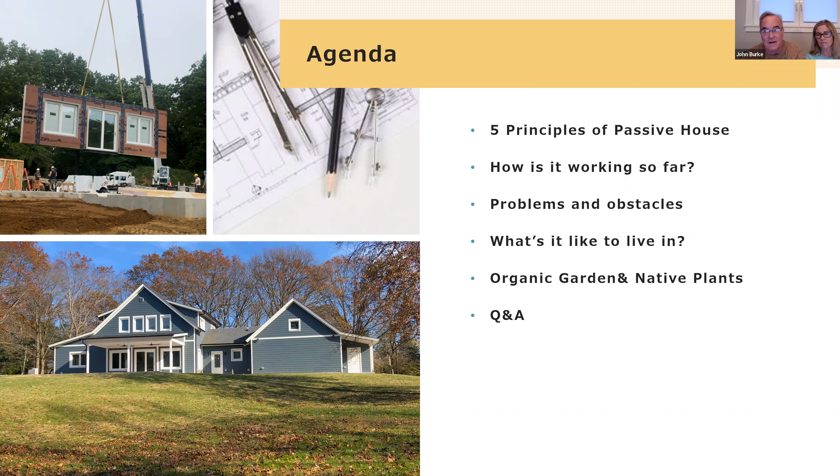So we'll walk you through it. Here's what we're going to cover. Steve asked us to cover the 5 principles of passive house, so we'll do that. We'll talk about how is it working so far. We've really been in here about 2 months, so we can talk a little bit about that. Problems and obstacles we encountered and had to overcome to get it done. What's it like to live in, which will give you a little preview. It's really good. And the organic garden, native plants, Diane's passion. And then we'll have Q&A. So yeah, as Pat mentioned, please hold the questions to the end, and then you can put them in the chat and we'll try to cover everything.

So the 5 principles of passive house, here they are. No thermal bridging. So the walls, floors, and roof are extremely well insulated, trying to minimize or eliminate thermal bridging, which is how heat transfers, pretty much going from hot to cold. Hot's always going to find a way to go to the cold, and you don't want that happening in your house either direction. Superior windows are really important, and we've done that. We'll cover each of these areas specifically.

Energy recovery ventilation, which is one of the really cool things about these houses. When we first started, I didn't know about this, and when I found out about it, I thought it was really interesting. And now seeing it work in real life, it's fascinating. It really works well. Quality of construction is very important. You don't want any leaks. Everything's got to fit together properly and be well made. And that leads to the last thing, airtight construction. We don't want any air getting into or out of the house other than what we want to do in a controlled fashion.

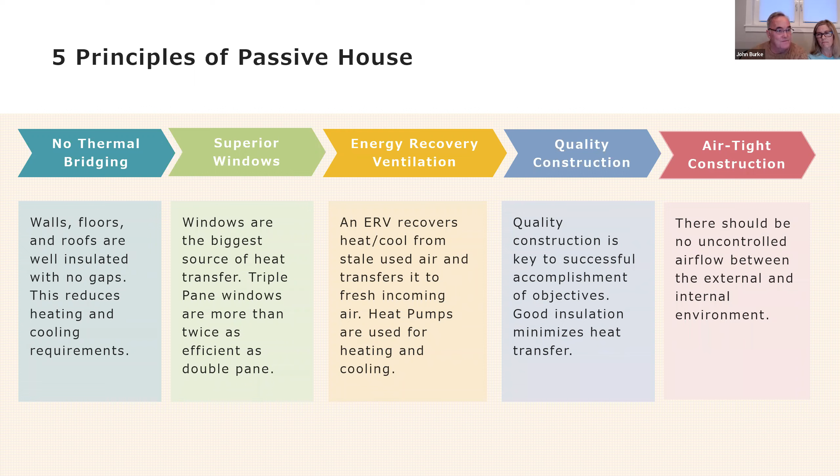So the no thermal bridging. Here's a picture of our house being built, and we'll go through how it was built in a second. But you can see these panels. There's a crane putting the panels down on our foundation. Those are 18 inches thick as opposed to a regular 2x4 construction house. And they're packed with dense cellulose, built inside a factory. So it's very energy efficient. It's very difficult for heat to transfer across there. Everything is built to perfect tolerances, so everything fits together and they bolted them together.

So there's no air gaps. There's our foundation. And we've actually built a slab, which we'll talk about. But you can see it doesn't look like a slab there. It's starting to look like a basement. And so the thing is not just a slab on the surface, but the footings are down 5 feet.

So any cold that wants to enter the house is going to have to go down 5 feet and then back up. And if you go down 5 feet, it's 55 degrees all the time, in the winter, in the summer. So that's a way they control the heat with a slab. There's insulation on the outside of the foundation. And there's the finished slab before the panels came.

There's the panels actually arriving. We had 7 semi-tractor trailers of the panels arrive, and a big crane that kind of assembled them sort of like Lego, and it went pretty quickly.

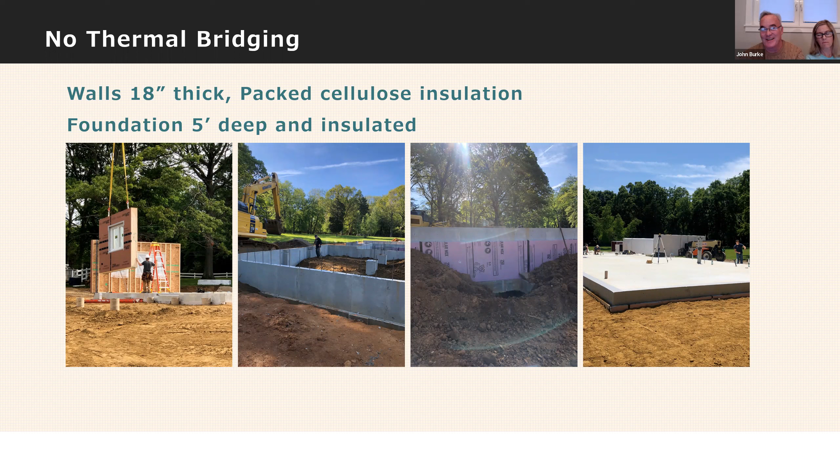So the second thing was windows. So the windows we have are triple pane windows, which I'd never seen before, versus double pane. And here I put the R values. You can see triple pane are more than twice as efficient as double pane. And windows are really the biggest source of heat transfer from a house. So it's pretty important. We like windows and we wanted big ones. And so it's even more important for us to have good ones, right?

So they're really cool. They're European, and you can see it's closed. You can open them that way, like a door, like the middle picture, or you can also move the handle all the way up and they pop out. So the wind won't blow it open and closed, or if it's raining out, you can still have it open there and rain's not going to come in. So they're really pretty cool windows.

We like them a lot. And there's screens that fit right on the outside. So of course, on a nice day, we'll have the windows open and enjoy the nice atmosphere outside.

Here's the energy recovery ventilation, which is critical to passive house. And this is one of the really interesting things that I did not know about before we started this. And when I found out about it, I was kind of fascinated by it. And now to see it work in real life, at first I was, I guess, skeptically optimistic, and now that I see it working, I'm just amazed. But so the concept is, it's a heat exchanger.

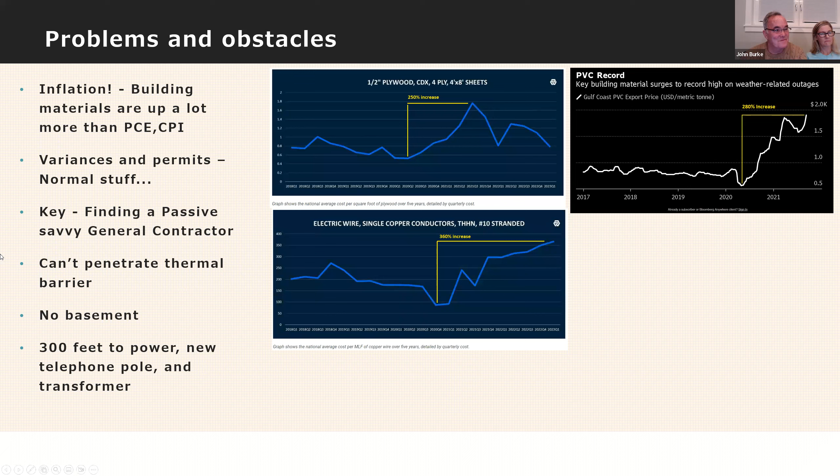So living in it, I think maybe I'll turn it over to Diane and let her take over from here. You want to do the living in it? Okay, sure. I'm going to be doing the garden and that stuff, but

And I have to say, with the ERV, the HVAC system, the house is the warmest it's ever been. Because for me, I never was comfortable with forced hot air. It just dried me up. It just felt so uncomfortable. So John and I would fight over the thermostat. Yeah, constantly. He's always warm now. He's not with a coat on and mittens watching TV.

And I think the air, if you come here and you feel the atmosphere of the house, it's very clean. It's really quiet. And it's really comfortable, almost like the 68 degrees is more like a 68-degree outside rather than inside.

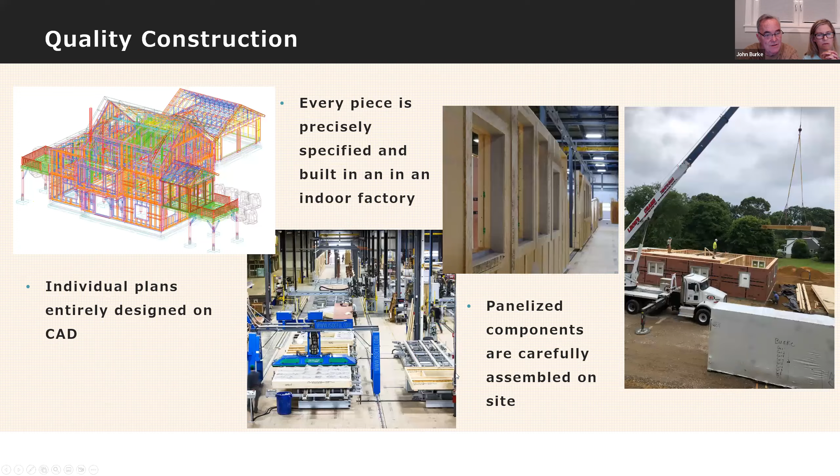David wants to know how much the heat pump water heater costs. And if you don't remember that, Steve could probably tell him how much ours cost. We can dig out the stuff. I did a good job of keeping all the bills. With our contractor, we worked out a deal where, rather than paying one fee, we see everything. So we could put things out to bid, see all the bids, and we'd pay all the subcontractors ourselves. So we have all the bills.

So we can send you the actual Mitsubishi heat pump water heater. I don't know if the water heater was Mitsubishi or not, I forget. How much was yours, Pat and Steve? It was slightly over $2,000, just for the heat pump itself, the material. But you also have to have installation, and Steve's labor was free. That's great.

So the labor costs can be as much or more, and if you're putting it in an existing home, you have to make sure that you have the electrical hookup for it. Yes, if you're changing from a gas water heater. Steve did that also. You have to have enough amperage. Yeah.

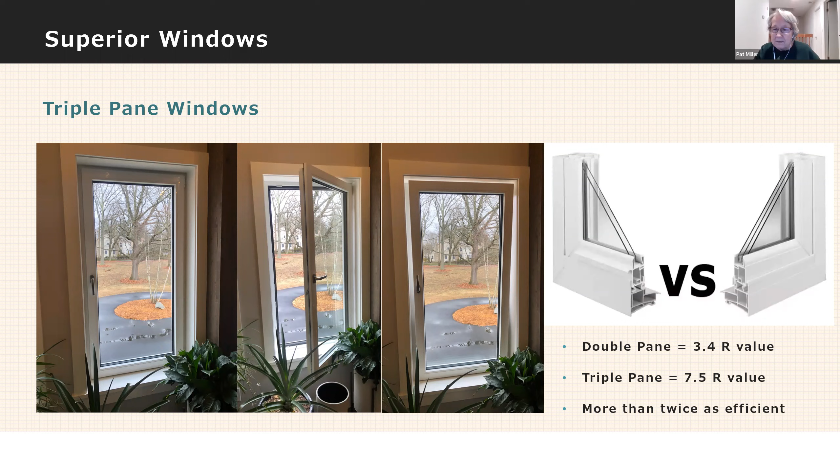Okay. The next question was about the solar, because she had to take a call, so she didn't hear you talk about your plan for getting solar. I didn't, and I meant to. Let me go back to that slide. Well, right now we don't have solar yet. We would need to get some actual utility bills with actual readings before they'll give it to us.

And Maribel also asked, do you do any water reclamation for your garden?

No, we wanted to. We were going to harvest the water off the roof and put it in a cistern. Again, with how much everything costs, it would be another cost, and so we kind of put that on the back burner. In our old house, we had a lot of big black water barrels holding the water. Which, 600 gallons, which wasn't really that much. Yeah, it didn't do much. Sounds like a lot at first, but then when you see how fast it goes, it's not.

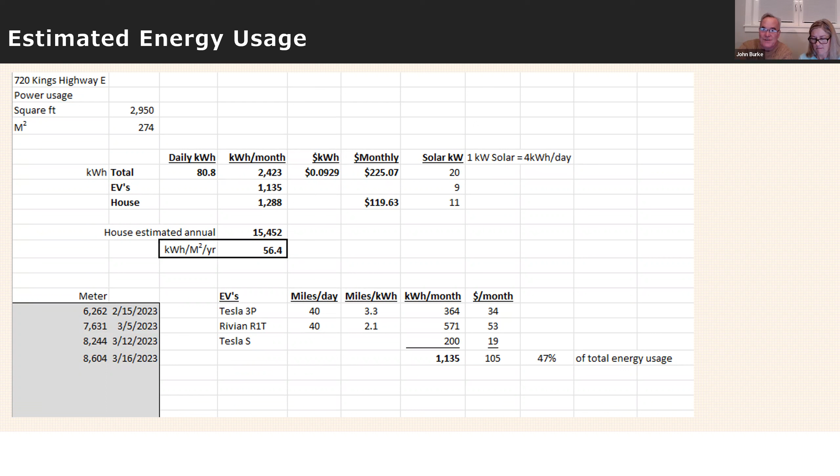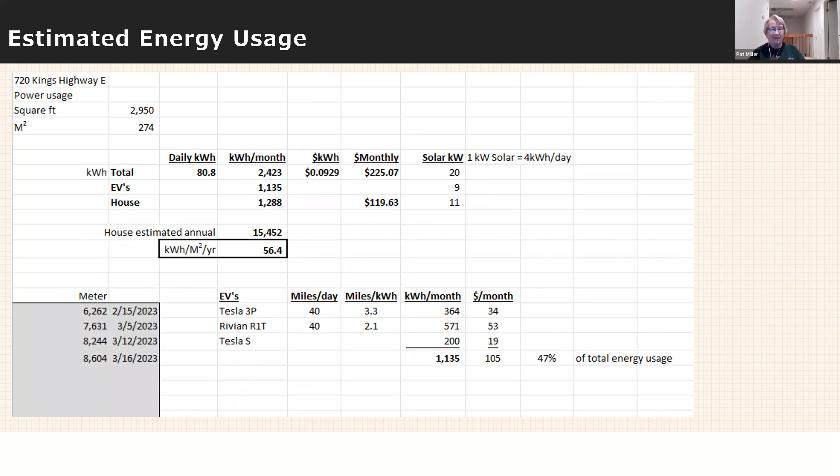Have a look at your electric bill, see what you're paying per kilowatt hour. It's probably around 13 cents, something like that. And then do the math. 1,000 watts for 1 hour of use costs you 13 cents. And if it's $182, it'll tell you exactly, depending on your amount per kilowatt hour, how many kilowatt hours that's anticipated to use for the year.

And another way that those placards are less than accurate, they normally tell you what it is for 2 people in a home. So if you have 2 people in your house, it should be fairly close. But if you've got 4 or 10 people in your house, it could be vastly different.